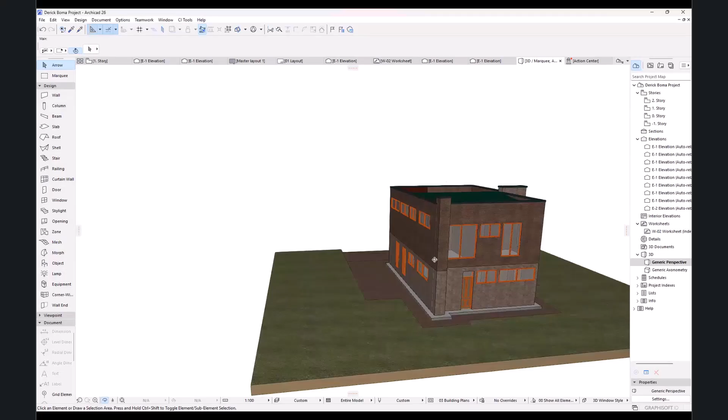Okay, share the screen of the last assignment and see where you are. Okay, wait, share. This one, sir.

So you are left with this, this is the first floor, and this is the ground floor. Your dimensions are not visible. Put in the scale of 100, 1 by 100 for me to see.

Okay, let's try. Okay. Yes, are you using millimeter? Yes, I can see. So...

And the wall of 230 for bearing wall and 150 for partition wall. That is not what is on the drawing, but it's okay, as long as what I need is to see that we are together. Okay, sir.

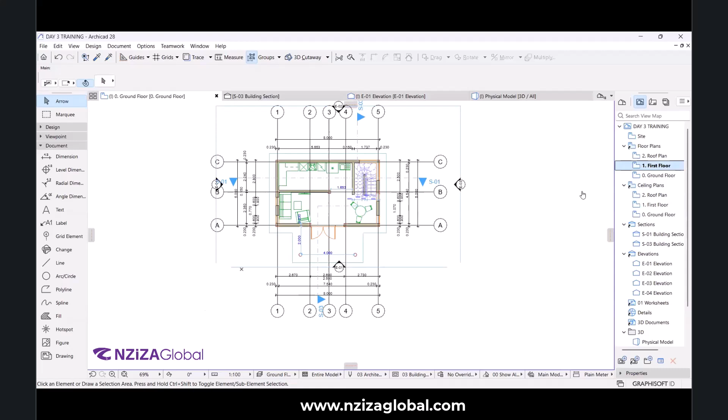Even the first floor is prepared. What is left is making this drawing black and white, and after that, prepare drawings for publication.

And in publication we will learn how to create a customized title block and the master layout. Then we will learn how to put on drawings and automate their publication with all information needed in the project.

According to the curriculum, let me check again. Today on day 4, we must create layout, rendering, schedules. Only that, other things we have covered them.

And renderings, I don't use ArchiCAD for renderings. I know it does it, but I don't use it. So, but one of our instructors in the architectural department has prepared a clean video for rendering using ArchiCAD, where you'll be able to produce top quality renderings. So I will share that, and you can watch it as you watch these recordings.

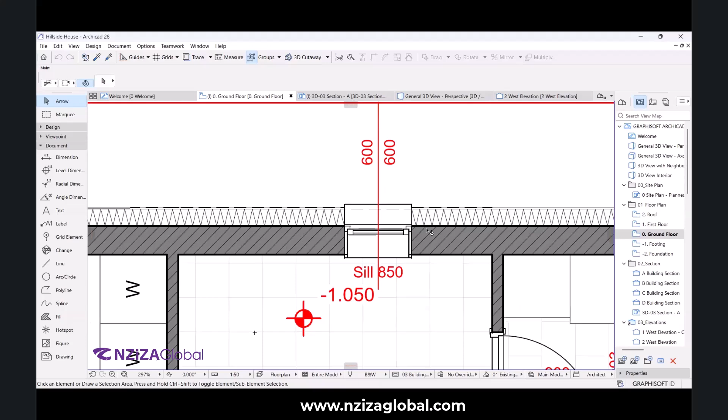I think what we didn't look into is putting this type of dimensions on the door, but we have learned to put them on outer dimensions. Even this one, we can look at it. It's a very simple and quick way.

But what I opened this to do is to show you how a drawing should look. You see, the outer walls are very bold. The furnitures are not that bold. The dimensions are in red, like one color everywhere, which makes it look very professional. Let's go into section.

If we look at section, furnitures look real, doors look real, but walls black, roof black, everything else black. And here underground, you can see they use the fill to make sure everything looks black.

Here is the 3D. You see that, okay? Now, that is what I needed to show you.

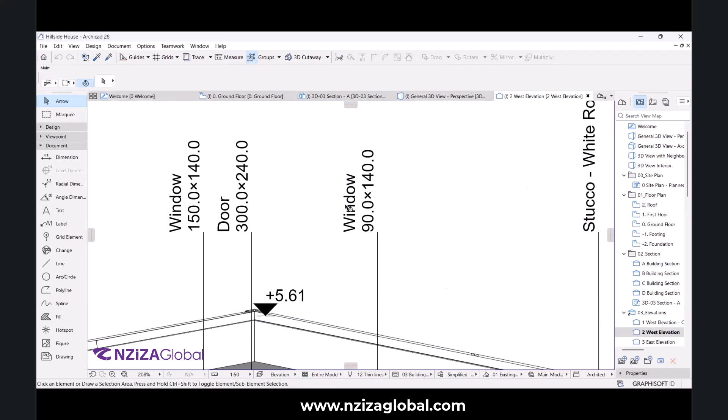Let's see elevations. Yes, you can see elevations. They put elevations, they put what we call label that we're gonna see now. Stucco, white rough, window - they put its size, everything. But this drawing is not detailed enough in talking about labels.

You can see how documents are planned here. There is a folder of site, there is a folder of floor plan that has all plans, the folder of section that has all sections, elevations, everything, schedules, everything. So we need to prepare this thing.

This is in a view map. When you go into layout book, you will see everything we saw there - site plan, its document, floor plan, all documents. You see everything in its folder. This is what I'm talking about.

So I'm going back to my drawing. I don't want to save anything. Now, you see our drawing?

Let's come on ground floor of floor plans. And these things, these are not in a layer combination we created, so I will switch to our layers combination. And let me delete this one. Now,

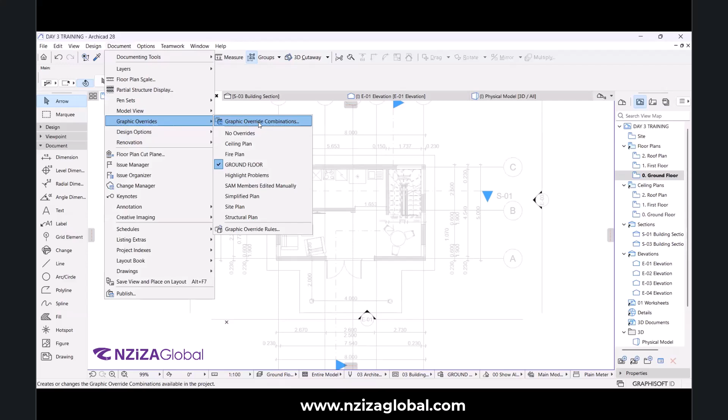How do we do that? Go back in Documents, Overrides, graphics overrides combination. Now, this is everything. We're gonna set a new rule.

This new rule will look for walls, will look for anything we cut vertically. You remember when we were learning about the cut plane and the floor plan cut plane. Now, what does that cut plane cut?

It cuts walls, columns, doors, windows. Is there anything? I think nothing else. But this time we need walls, columns to be black and the doors and the window to be red. Just we are trying to interpret the drawing we saw from ArchiCAD 28.

That's how it is. So I'll create walls and columns and click OK. Now I'll go here and set its rule. Element type here is all types. We will change from all types to wall.

That's number 1. Now we'll add number 2. When we create a number, we click add, and number of things will come here. What we are changing is in main, it's an element type we need to change. I'll click on it, click add, and when I add it, it will come here. Element type is all types, we'll change from all types and go to columns.

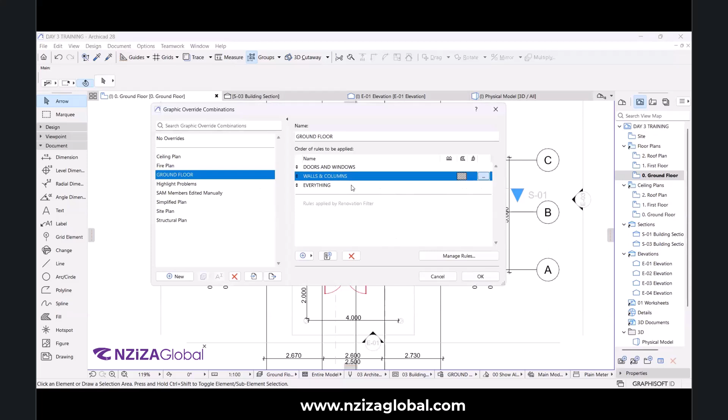For example, I needed to change this grid system to red as well, like doors and windows. I'll go into this document. I will go into walls and columns, and I will delete, I will remove grids, remove, then click OK, and OK. You see, it went back. I'll go back there,

and I will add them into doors and window, that's where we need it to be. And I will add grids, sorry, grids. And I'll click OK, I'll click OK. You see, they also come in red.

This way you see our drawing looks more professional. So if it was a big drawing, of huge size, I can see this section line and everything also are not included. So furniture must stay this way. It's the perfect way to make them look, because we don't need to confuse our architectural plan. So this is because this is architectural plan, like construction plan.

If I was doing a furniture layout, I would go these walls, make them in a smaller resolution, and make this furniture appear in bold, because that is what I will need to present. But now we are presenting a construction drawing. We don't need the furniture to be big. So how do we go about it?

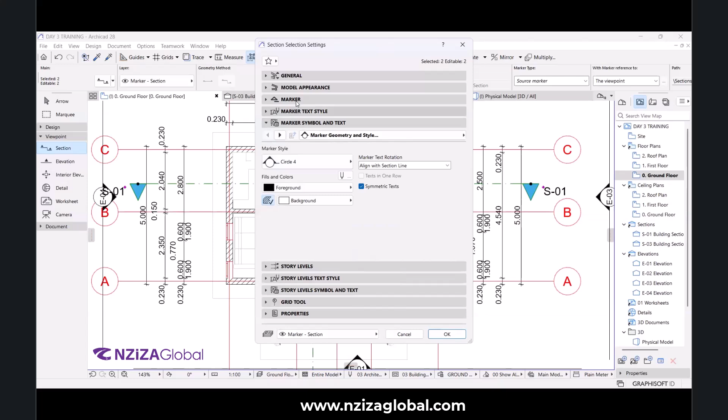I'll change this to black, and go to marker symbol. I'll move down to circle 4. I'll go back into marker and see how it looks here. I'll move it to 10 millimeter, see how it changes. I'll go into text and change it to 2. Here, the text size, I'll change to black and click OK.

You see, our section looks more beautiful. You see, we have section 1. We also have section 3. There is no section 2. We will change this to section 2.

I'll come here in the section setting. I'll go into, is it general? Yes, general. Section, this is hyphen, yes, 03, I'll change to 02. And I'll click OK. You see, the name has changed.

It works the same on elevation. This is elevation 1, elevation 2, elevation 3, elevation 4. Perfect.

Now, that is a good way of preparing the drawing for publication. I will remember to save. Now, that is ground floor. You can do the same to ground floor. You can do the same to first floor. Please try it and see if it works before you go to the next step.

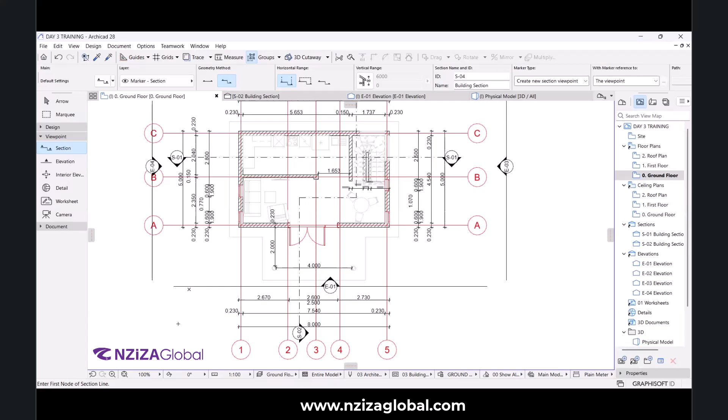So to solve that, you come into option, element attributes, pen and pen colors. And here, you come down here and you increase. No, you select which one have you been using. You have been using this one. And maybe it is because we turned it into centimeter. But to fix that, you can select wall, go into wall setting. If you come here, cut surface, cut line pen, you will see it's a 0.35 millimeter, which means this needs to be increased so that our line can be more bold.

We'll go into option, element attributes, pen and pen colors, and here it is 0. When we click on the color we choose, it is 0. It is 0 because by default it is 0.35. When it is lower than 0.5, the software goes down to 0, but the number you put there remains there and real. And when it is above 0.5, the software will put it to 1. Let's do 0.6. You see, the software turned it to 1, and I'll click OK.

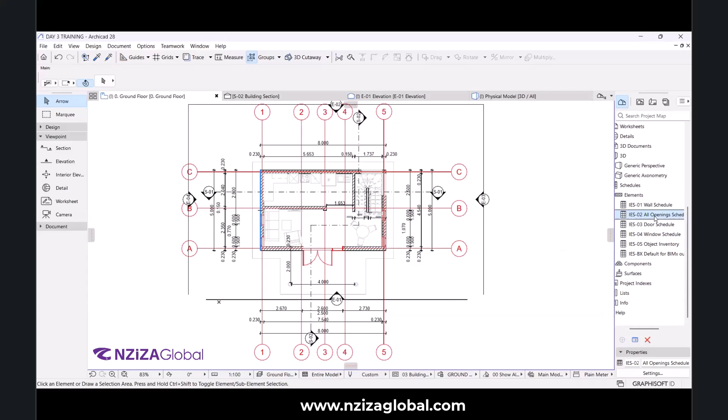We can do one by one, but this time, like wall schedule, we don't need it because we only have 2 types of walls. Let's check opening schedules. How do I do that? I'll open it, double click. You need it to follow. I will double click it.

Now, by default, it is very chaotic. It has a lot of chaos. We need to prepare it in a way it will be published on the paper and look excellent.

How do we do that? Firstly, there are details here that you must understand. We have title, which is all opening schedules. There is element ID. You remember when we were pressing every opening, it used to come with its ID, and this ID is editable through the floor plan. Now, when you see here, there is element ID, corner window 001. Here is the door 002, door 002.

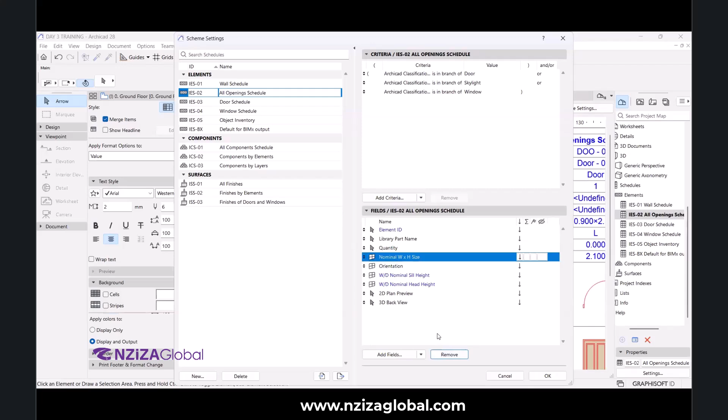Now it is requiring me to slide like this so I can see other sides. To fix that, I will come down here and click to fit. Now everything I have in my schedule is visible, so I can judge my drawing now. What else do I need to remove?

There is an opening name, this is very important. There is, I can click here to move down. There is a quantity, very important. There is a width and height size. Like orientation, we don't need orientation. Let's go on scheme, I will find orientation and remove it, and click OK.

Once I click OK, you will see the number of doors that were duplicated. Do you remember we had this type of door in two amounts, two categories? Now it is combined and quantity is saying two. We have this type of doors into two. Why? Because one was in orientation of left, and that was in orientation of right. That was making them two separate categories.

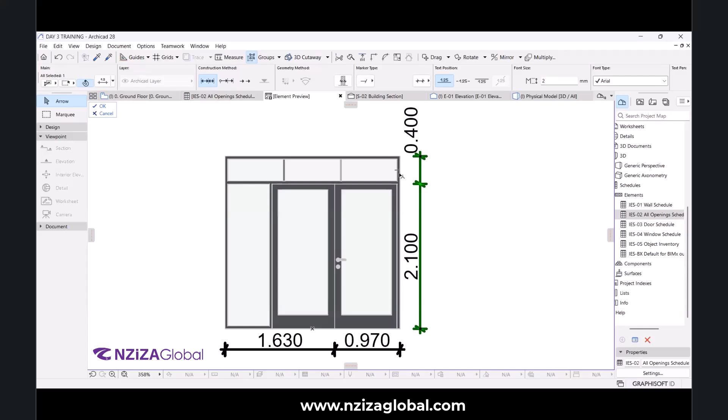This is dimensioning like normally we do. You select this dimension line, just normally we do in the dimensioning. And you will select control, and you will select where you need the drawing to look. If you remember, this is exactly what we set on this door. We said that the shutter should be 2.1 and transom should be 0.4, totaling to 2.5. And here I'll select the line, I'll click control, and I'll click here.

Which means this is bigger than this? No, it might depend on where you click here. You just have to make it equal, because this is what I'm showing. Once that is done, and that's what you exactly needed to look, you come at the top here, you will click OK. Once you click OK, you will see that here, those dimensions displayed as visible.

Now, we still have this door and this door. They look exactly the same, but they are differently categorized. How do we fix that? We will fix that on element ID. This is called 003, while this is 004. And as long as both doors are the same, they should have one ID. How do we fix that?

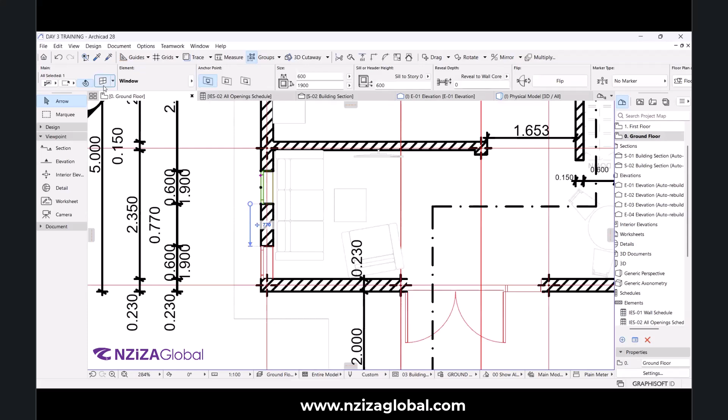I will select it, select on floor plan. Where was this one? I'll go into setting, classification and properties, and I'll change it to 1. And I'll click OK.

Go back here. You see, it has become now 8. Why? Because on the ground floor we have 4. On the first floor we have another 4.

But I think there is again another mistake here because one door is the louvres, another door is the glass, right? It's good to make this mistake so you can see how to fix it. I will come here and I will select the one of glass. And I will go into setting. I will make them 2, window 2, and click OK.

If I come back here, you see there are 4 with louvres, 4 with glass. There we go. This is all opening schedules.

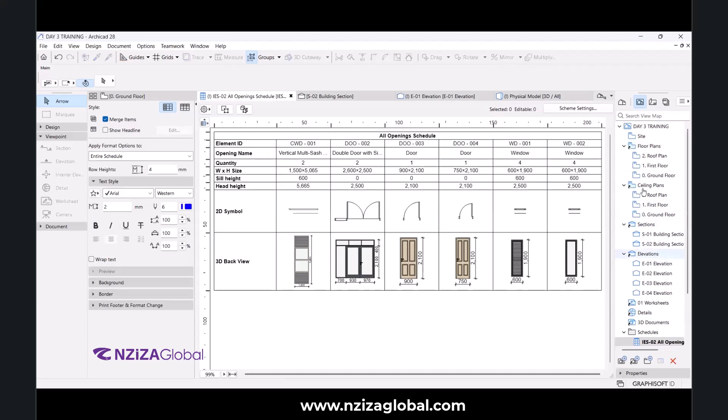Now let's click on ground floor. If we click on ground floor, you will see the software will bring its settings the way it needs it, which is not what we need. Okay, I will click how to turn it into what we need.

I will right click on this view. I will go into view settings. Now, everything here, I don't have any problem with it. Now there are things to change here.

Layer combination - this ground floor, we have made it ground floor arc in our layers combination. Now, pen set, architectural 100, it's okay. Another important thing to change is graphics override, because we changed it in the graphics override combination.

We turned it into ground floor. Okay, you remember that, doing that? This is how we named it.

Now we will come into 2D and 3D. You will see it is dimensioning into plain meter. I will change to these dimensions - just dimension we created on our own to make sure everything is in millimeter, areas are in meter square and everything. Once that is okay, I will click OK.

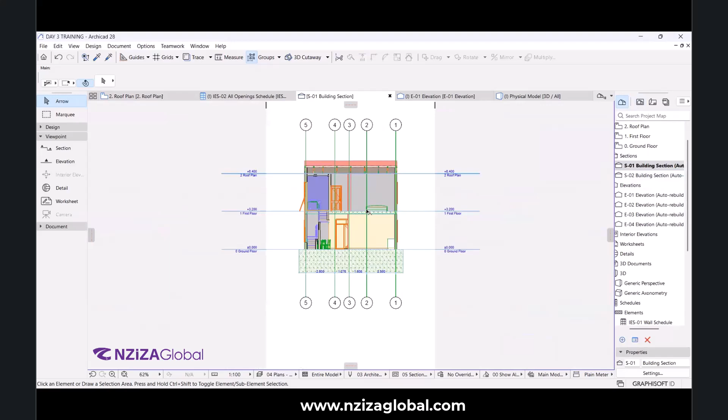But the way it looks, it doesn't look professional, as you can see. Even this one is automatically generated, but it doesn't look professional, as you can see. So now, how do we prepare it professionally?

Firstly, we already know it must look black and white. That's the first one. That's simple - I'll go in the override combination and change it to ground floor. Just a quick way, but you should go and customize it in a way you run it, like making everything here black and white.

You see, because it's in a section, a number of things don't look clear. I'll go back to no overrides. And I will go to customize to make it professional in a way we did it on ground floor.

How do we do that? You remember all the processes, but let me repeat them. On section, it is applicable. On elevation, it is applicable on.

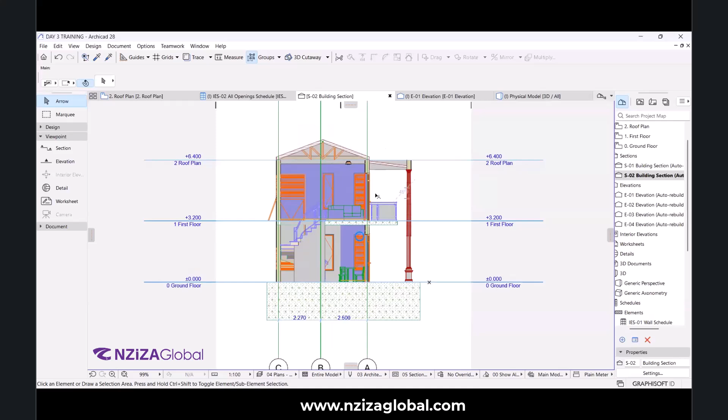How do we go about this? We will go into documents, graphics overrides, graphics override combinations. And now the combination we are going to create is called section.

Once that is created, Gaspar, are we going together or are you also watching? Because I need to know the speed I will use. Are you also practicing or you are watching? Yes, we are going together, I'm practicing. Okay, if we are going together, let's go slowly, because Victor was watching, so I was not going quick, because we need to revise later.

Now, did you open your graphics override? Yes. Okay, now once you are done creating graphics override, you come here and set rules.

Rule number 1 will be - no, will be everything. Here we'll set everything. And I will create - this name already exists, yes, I can do everything slash 1. It already exists because we used the same on ground floor. Then I'll click OK.

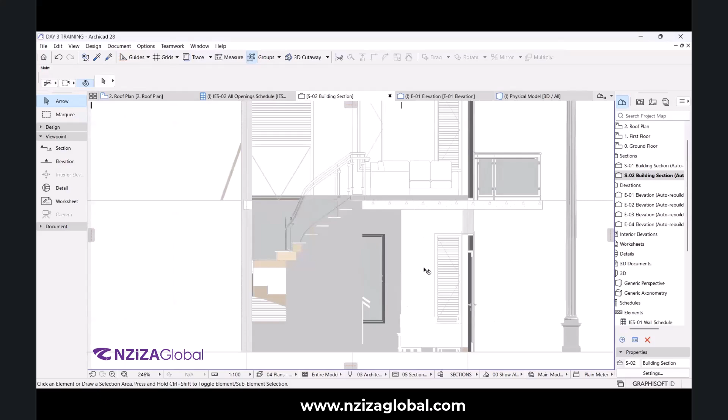I believe everyone is here. Now the second step is to make this wall, these beams, this what visible. How to do that?

We will go back there, documents, graphics override, graphics overrides combinations. We are in a section, everything is set. Now we're gonna set walls, beams, like something we need to appear in black. What is that? There is walls, columns, roof, etc.

So we'll set rules and we'll make it walls, beams - do we have beams there? I don't think so, but whatever, etc. Okay, you name it the way you need. Then I'll click OK. Now that's the rule we have created.

We're gonna set terms, click here. Now element type is everything. Now we'll change it, it has to be wall only. That is wall only, but again we don't need wall only, we need also columns, and even roof. Let's start from roof, let's go to add.

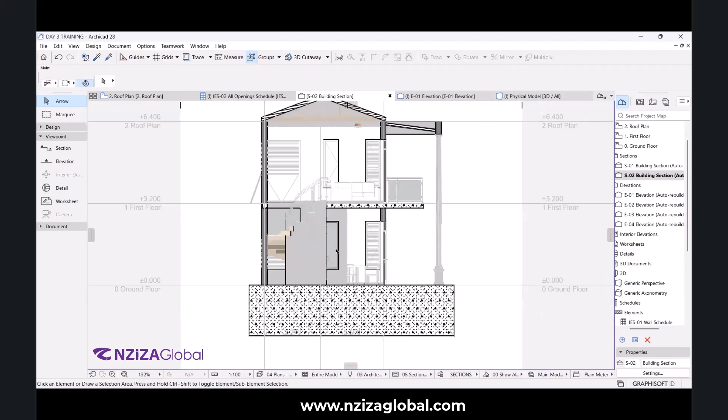What else? The else is doors and windows that I'm seeing there. How do I do that? And even this elevation and the grid line. I'll go back, but I don't need to create new.

Yeah, I think I need to create new, so I can make them look red. I'll go here, I'll create a new rule. This new rule will be dimensions and the grids. Click OK.

I'll go into setting my rules, element type, not everything. I'll make section, add another one, main element, add, all types changed to elevation. Do we have elevations there?

Yeah, we do. Okay, add. Is it elevation or it's levels? Let's go to elements type, add. Then I'll come here and it will be, is it dimension? Should we make dimension included? I don't think so. What else should we include?

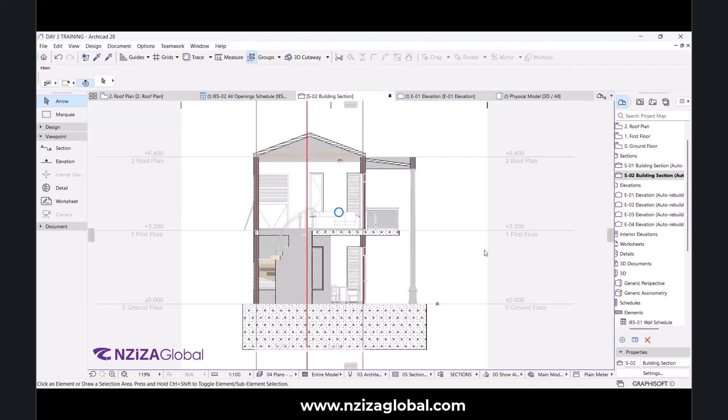Now, we are going to prepare our drawing in a serious way. This is, do we need this? Okay, let's suppose we need it.

Dimensions. Let's go add the dimensions to these walls. Graphics override, that is wall and beam. I'll come here, I'll add element type, add.

Select more dimensions. Click OK, click OK. Now we can see...

Do we have, I think, roof trusses? Roof trusses come as a part of object. If I go and add them, let me show you. We need it black, so we'll add it in the walls and the beams.

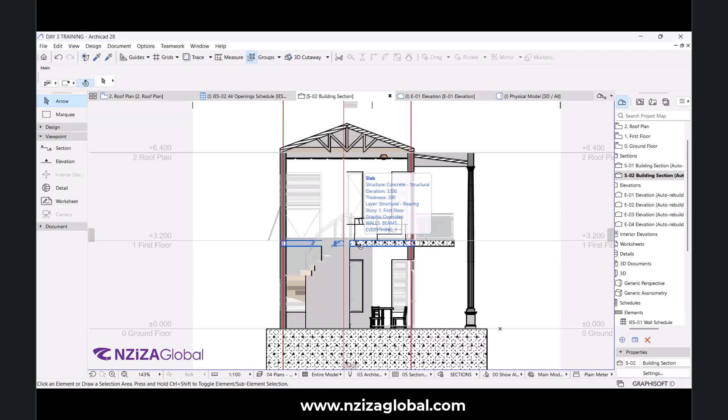Now, that is about coloring, but our section is not yet looking professional. If you remember, section cut from roof to underground. What are we going to do about this?

We will draw other things here. What are those other things? Subcolumn. And here we'll make this a soil, not concrete as they look.

Okay? I can right click, hide layer. No, that layer, sorry. What was that layer?

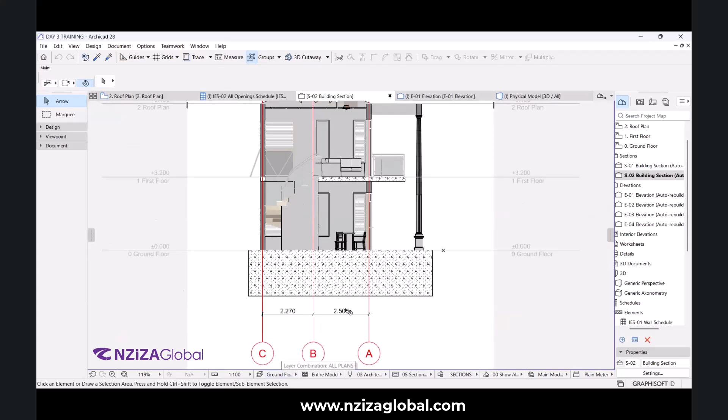Let's continue with what we were trying to do. Okay.

What is the next one? The next is section. Section, what first thing section must show? Section must show levels. To do that, I will go into dimension.

There is a level dimension, which I don't know why it's not displayed. But I can click just, no. This level dimension is level for floors in 2D. That's why it is not displayed. To put level dimension in section or elevation, you come into dimension and you come into dimension setting.

If you put anything there, trying to dimension from here, it will dimension like it's a floor plan. That's why it is important to come here into setting and tell the software that you are going to be dimensioning vertically.

You see? And now here, it is how this icon will look. I can choose the first one. And here on the second is, do you need to pick the top of the material you need to show dimension, or bottom, which is the same?

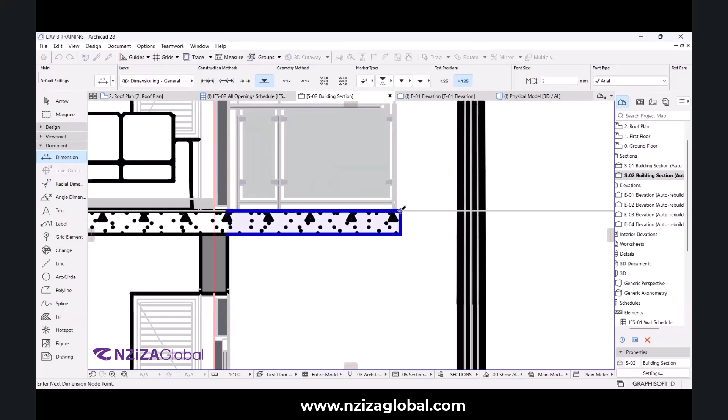Here it's automatically dimension walls and slabs. I'll click OK, and I'll start at the top here. I'll click, and once I click, I will need here as well. And I will need here as well. And I will need this slab as well. And I will need this level as well. Once I'm done, I'll right click OK, and I'll bring it on the side.

You see that it will come and take the levels. Okay, it means that here it is on 0. Here it is on 3. I can drag this aside here. Here it is on 3.5. This one, I can drag it on the other side.

This way, so it means from here up to here, there is 1 point something. Now here at the rooftop, it is that way. That is the dimension. I can come and continue even on this side.

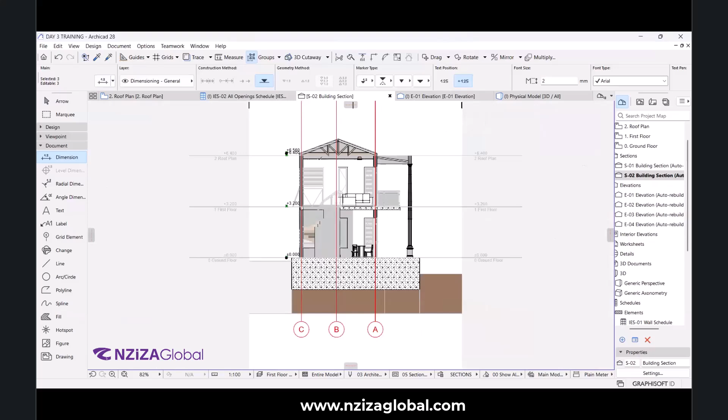You see, very small. That is number one thing you must do on your elevation, on your section.

Action number 2 is to annotate your drawing. Because if I look at this section, how will I know this is a gypsum ceiling? You remember this is Armstrong ceiling. But how will I know if I am looking this way? These terraces, is it made of wood? Is it timber? Is it steel? You must leave no confusion behind. Everything must be clearly, what? Clearly annotated here. How do you do that?

Gaspar, are we together? Are you on the same stage? Yes.

Okay, now we need to annotate, there is auto annotation here. You come here on label. Now this label, you click here, you come into setting. How do you need it? Is it auto text? Is it classification and properties? Is it ceiling, slab levels, things like that? There are a number of things. Let's use this auto text.

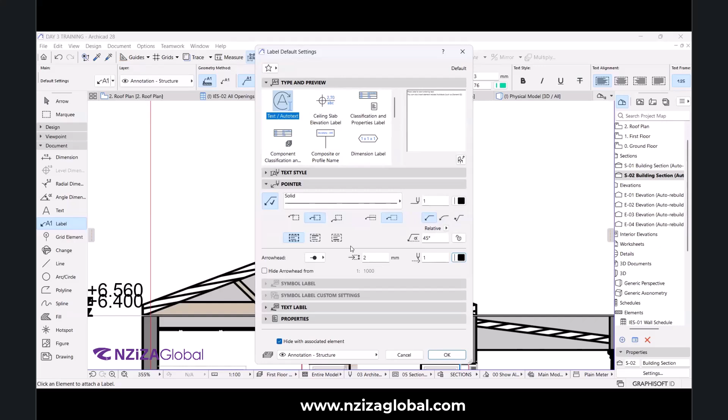Make sure it's black. Text 2 is enough. Pointer, how do you need it to look? I need a dot, and I don't need it curved. I need it with angle. And I need it black and black. Text label, you need it this way or this way. It's just, this doesn't matter. And you come and click.

Once you click, now there is, sorry, now a label. Where is it, label? Then click. You need to type. What is this? This roof, what did we put on? When you see roof, what information must you know about the roof for you to be able to construct it without troubles?

You must know roof covering. You must know roof structure. You must know the pitch. You must know, I think that's all. So let's say timber roof structure, pitched on 25 degrees.

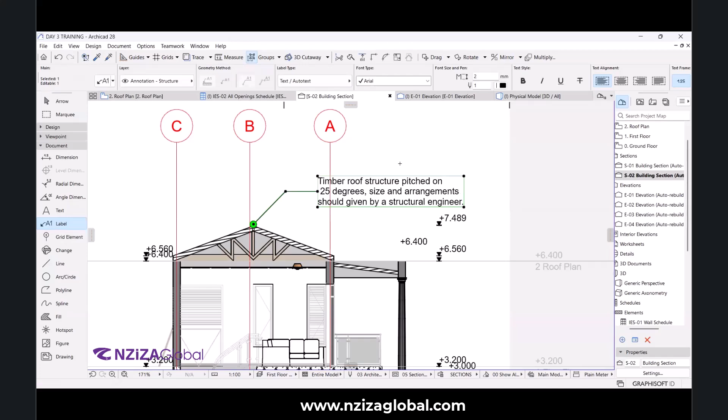number 1. Ceiling, let's press another label on ceiling. This is Armstrong. No, we don't need to do these protocols. We can do. This is gypsum ceiling, gypsum ceiling.

What other details do we need on ceiling? I think it should be level, and we'll give it in a dimensions. Does it have light and AC? Those a number of things. Yesterday we put AC and everything. So if it has, we will write it here. That's all.

Now this gypsum ceiling is conflicting with my dimension, and this font is too big. Let me put into 100 to see how it will look. There are too big, so I will select them. I'll go into setting. I'll go into pointer, here is 2, I'll put 1. And I'll click OK.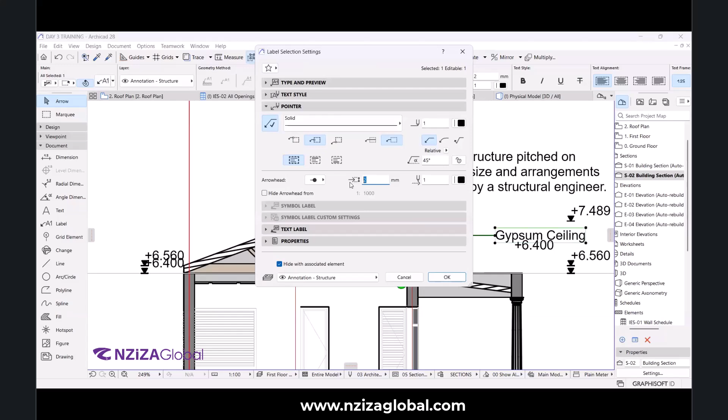Now it's conflicting, so I will select, click here and go to move, and I'll move it this way. That's all. That's all.

Very tired. Teaching is not an easy job, I can say. Now, let's go on.

Sorry, there's a disturbing guy here. Now, let's continue.

That's the second thing. Now, please understand that anything visible here which is not clear, you must put its label and explain it.

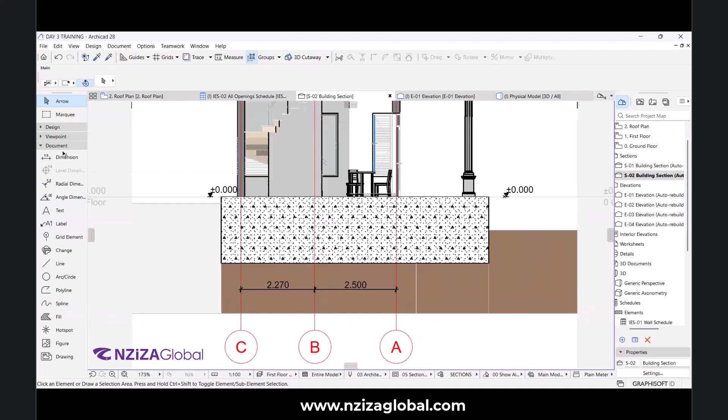How do I fix that? Firstly, there is part of floor. Please follow. I will go into documents, fill. It looks like drafting general is not visible. I'll make it visible. Come here, drafting, visible, set.

Okay. Now I'll go to fill here. What you must understand first, its depth. Depth will be 20. That is number 1. Number 2, this structure will be made of concrete because it's flooring.

I'll come here. I'll go to dash here. I will find the section that looks exactly like concrete, reinforced concrete - structural concrete. I'll click OK, and I'll make sure it's black, and I'll click OK.

Then I'll come to place it. Now, placement is, there is a polygonal or rectangle. I'll select rectangular, and I'll come here, and I'll switch up to here, and I'll make sure I move down 200. Now you see my dimension lines - there is dimension 1, there is dimension 2. Dimension 1 is horizontal, which is okay. Now the issue is moving down.

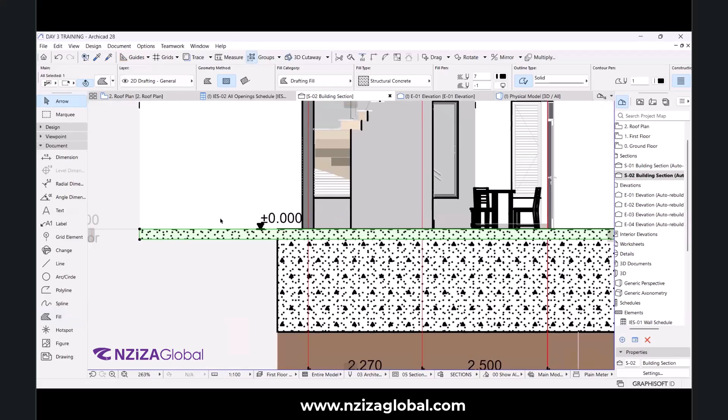You see my concrete now. It doesn't reach there. I will select it and expand it the way I expand other things.

That is concrete. Now there is another short pair of floor finish. I will do what? I will click. Remember, we are doing a section of this, but sometimes you might find yourself needing to do section of even site, etc. But I don't understand where I will need that one.

So let's go to fill again. Fill setting. Now we will not select concrete, structural concrete. We're gonna select - do we have cement? No cement. Finish? No finishing. When you miss it, I saw something like carpet. Let's see tiles. Facing tile.

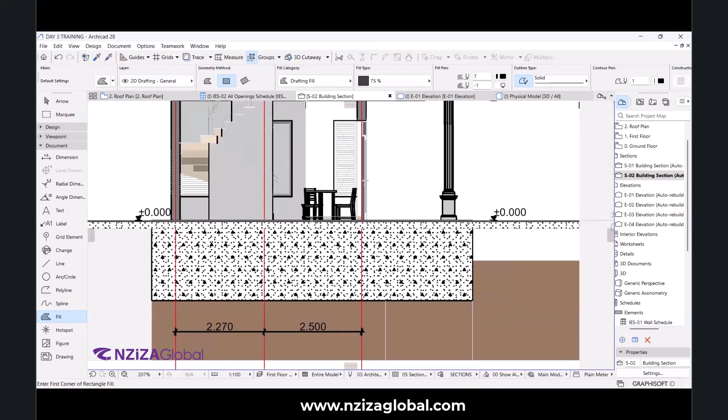Now, if we put on 100, you will see there is something there. Aha, now below this concrete, what is there? You might put whatever you need there, but you must follow construction standards. Let's suppose there are stones.

Hardcore. I'll come in again, I'll click here. I'll go there. What is the size of stone? I'll click tab again, and I'll put 300. So this fill, I'll go into editing. I will choose stonework - fill stone. I'll choose fill stone, and I'll click OK.

But this stone, I don't think this stone is a finishing stone. No, I think it will look like this. Then I'll continue. So below stone, what is there? Below stone, there is a soil. Or I don't need this, I can cut from here. How will I do that? I'll go to fill to remove these things below.

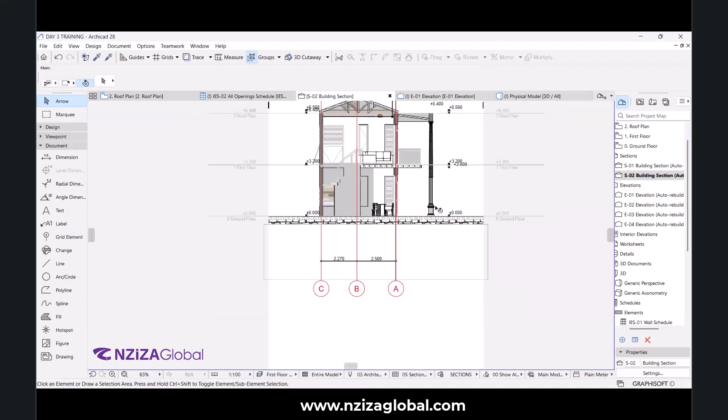Okay, that was the last - did I say last? Now let's go to the last thing you must do. Is it the last thing?

Let's go to underground. Underground, there are other things that must be shown: subcolumns and section, and the footing.

How to do that? I will go into line. I will start the wall, move down to wherever I need. Let's move down 500 - sorry, it has not to be right, it has to come here. I'll come here and do here.

500, move down. How big will the footing be? Let's do 1 meter, because this is not the job of the architect. 20, no, let me do 40 of thickness. Now I will reach here and click OK.

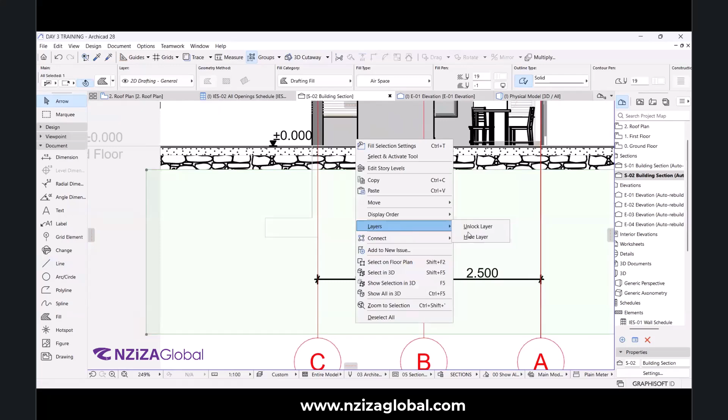Sorry, I will select this one, this one, this one, this one, and I'll click Ctrl-Shift-M to mirror.

These lines do not look like this at the top. Why? Because in my graphics overrides, I didn't add drafting. Command add.

Okay, now this line - because they are underground and we don't know them - should not be a continuous line. You will come into solid line, you will select dash dash line.

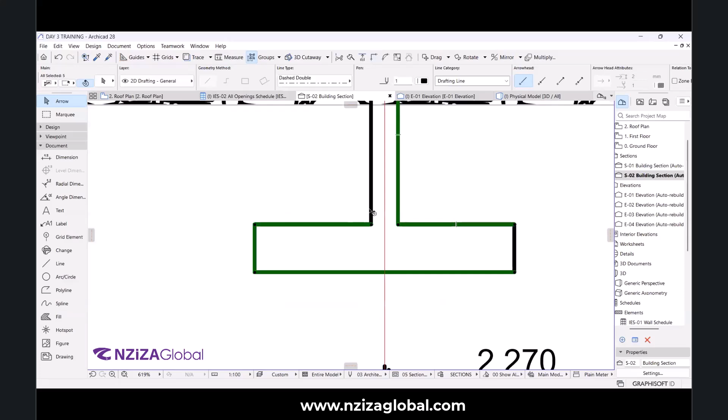Setting, double dash, click OK. Did it work?

I don't really know this kind of stress. I'll come here, select this solid line, double dash. Now let's click dashed, make it black, click OK. Move here, move here, move here, move here, move here.

I don't know why it's not being dashed. Now I will check why it's not being dashed. The first thing is you must move this.

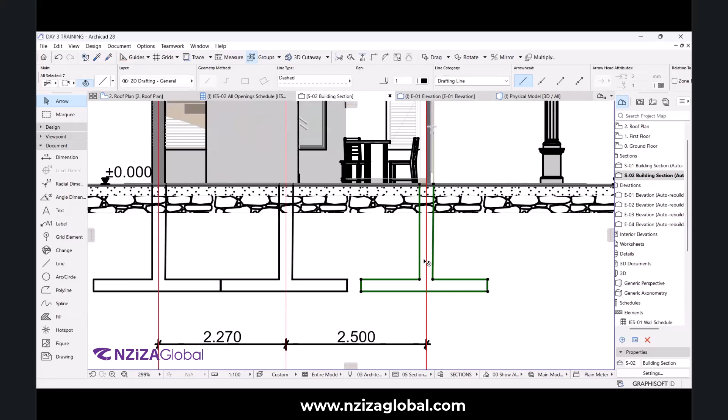Ctrl-Shift-D. And make sure they are in the center, and make sure they are on everything that has a grid, because this grid represents the columns. And also Ctrl-Shift-D, and this one as well.

And because this is for balcony, its footing can be shorter, no problem. Okay. As this one is in the middle.

Now, once that is done, you must fill. Click fill, because this is a concrete - this is a concrete thing. Concrete, structural concrete. Click OK.

To fill automatically, you select everything is set, you click this space bar on your keyboard, and you click in the middle of where you need to fill. Middle. And it will be filling automatically.

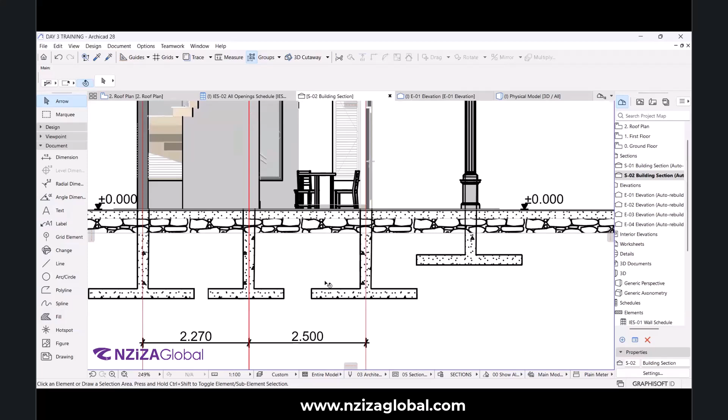Okay, now this is not our job, this is a structural job. That's why you can leave it like this, or you can write 'subcolumn' or what, and put that the details will be determined by a structural engineer. That's very important to highlight.

What you must do as an architect is to put labels on this type of footing. Now, these footings are here, but they are not in the air, they are in the soil.

That's why you need to change this fill to soil, earth. Click OK. Click OK. This is earth.

Now we have got a section, a very serious section, but there are things that are missing. I hope we are going together. What is left is to make our section more beautiful and sexy. How do we do that?

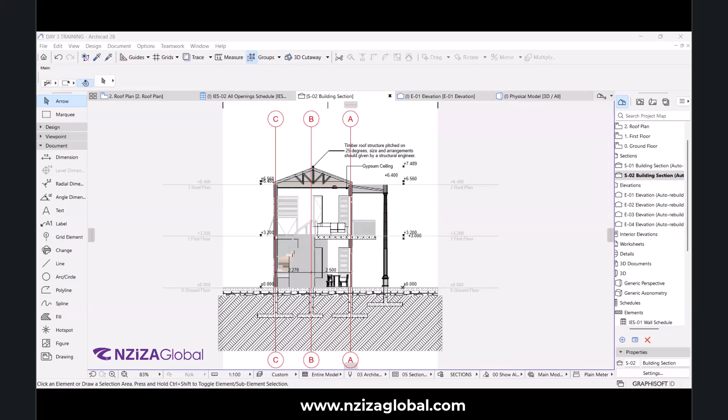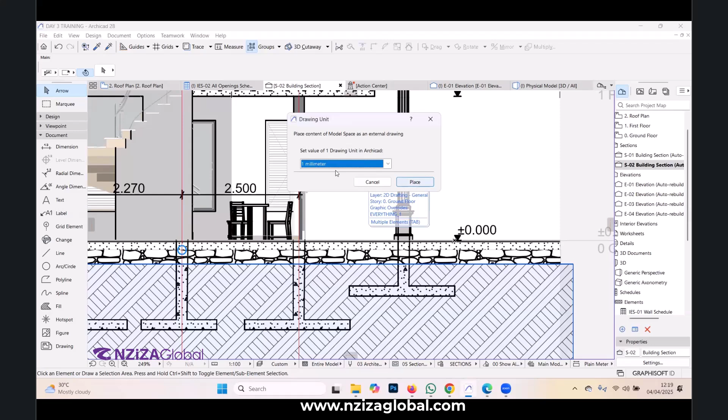The software will tell me the set value of one drawing unit in ArchiCAD is 1 millimeter. You can change to other units depending on the dimensions you draw and used in your project settings. As I'm in millimeter, I'll click yes and press.

The woman has gone into soil, so I will select the image. I will bring Ctrl-Shift-D and I'll bring her up.

Bringing her up, even if deselected, she remains looking blue and with a frame. To fix this, I will select it, do right click, and come to explode into current view. The software will ask me this, I'll say okay. Then I will select this frame and click delete on my keyboard. This woman remains 2D there.

I will go back and download someone else. I will download this Donald Trump image. I'll open this folder, come here and drag it into ArchiCAD. Let me put him here.

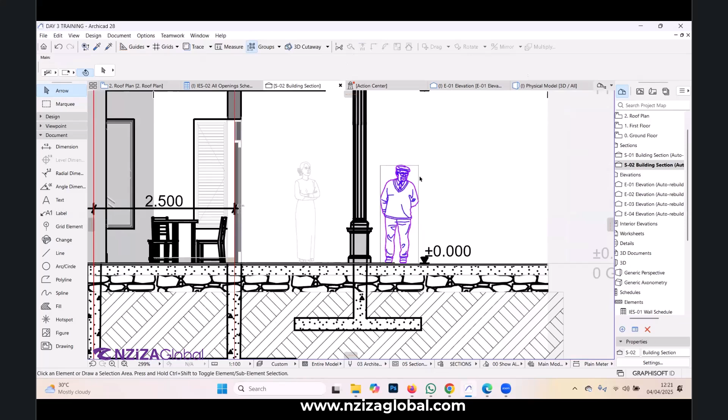Ctrl-Shift-D, click this dot, move her up. I will select, right-click, explode into current view, OK. Deselect, select it, send delete. Now, I'll do 100.

You see how my section will be looking. This is about the people. You can go back there and download the trees and furniture, etc.

Let's download this tree. But downloading a tree is a waste of time. Please do that, and once it works, I will show you how to bring trees and sky and everything automatically.

Let's continue. The next will be to put trees and cars and other things automatically. You will come to Google, you will write architectural section background.

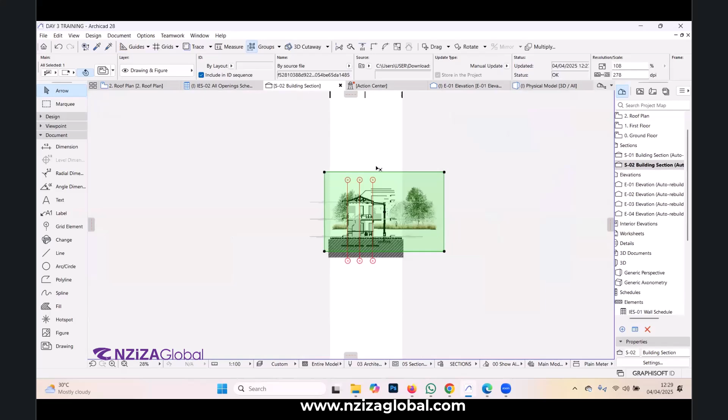Control D, move it down this way. But this image is too short, and if we go to expand it, I think it's possible we can expand it this way, but I don't think it will look beautiful. It will become a mess immediately. So I'll leave it, I'll go back and download the other one.

File, external content, Place External Drawing. Import. Click.

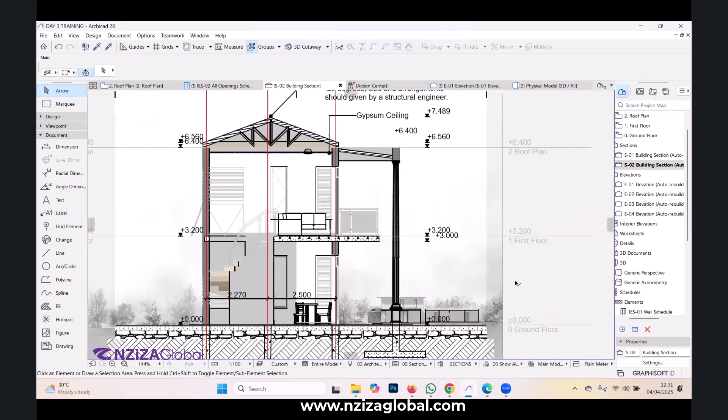You see, it has gone back and it's looking small. So I think this is suitable for elevations because elevations don't need this type of detailing, dimensions of what and what. You see, we even have a house there.

Or I can do this way, and I'll move down, Control D. This one. This is the way, but my people disappeared. Did I delete them? I will select this one to make my people visible.

Right click, display order, send back. Once sent back, you see my people now are visible.

That is all. I think we have run everything we need for section. It's you who's left to go there and make the section more detailed in the way it will be used in a construction project.

Now, what is left? It is to put on... What is left? It is to come here. Oh no, let me wait for you. First finish, reach here and say everything is on the same before I continue. It worked, so we can continue. It worked? Yes, okay, let's continue then.

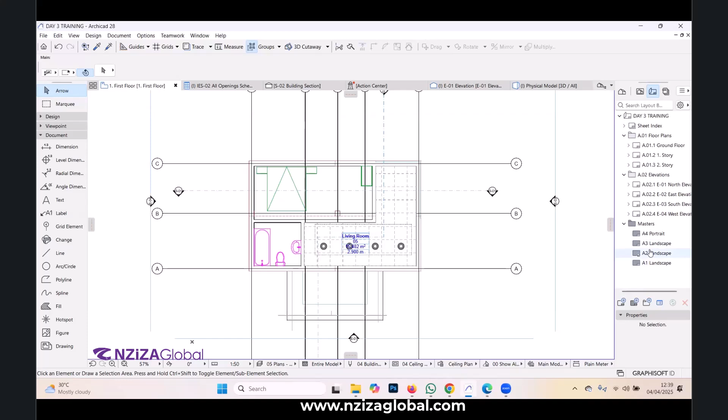So now when it's there, we know everything regarding the project. So now I believe all of you know what a title block is and what should be incorporated there. Now we are going to prepare our master layouts. In my company, we use A2, so I'll come here in the layout book, I'll select A2.

But depending on the project specification, your client or project requirements might oblige you which paper size to print your drawing on. Some projects oblige that. But if they oblige A3, you will come and set A3, it's here. If A4, you will set A4. If it is A1, you will set A1. But now we will set A2 just as an example.

Now, setting A2, there is a title block which is by default. But the title block has the revision history, which is okay, company title, which is okay, but it has a number of other things we don't need. Okay? So there are even other things that are missing. How do you add them?

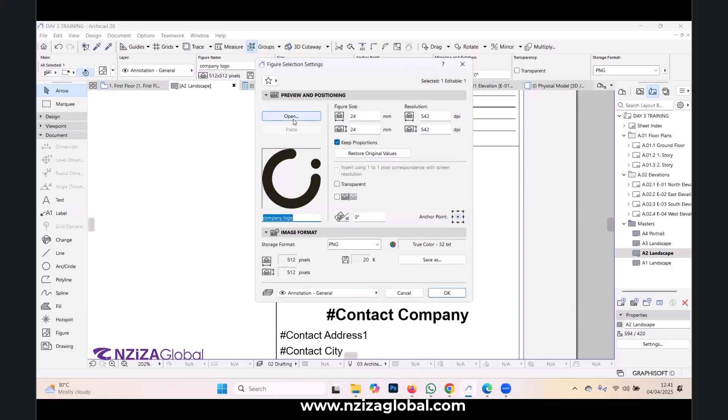Firstly, let's add what is possible. There is this logo which is by default of ArchiCAD. We'll change it with our company logo. We will select it, go here to change image. There is this company logo. I will click open to go into my file to select my logo. I will find our company logo here. I will click open, I will click OK.

It comes big by default, I will have to resize it. I'll click here and I'll click here. The company logo is already there.

Now, contact address, everything is here. Okay, but please follow these things. These are normally the same on all projects. For example, if we are talking about company address, postal code, the country, everything, it is the same. Project name, it is the same, even its address, it is the same. What is different is the drawing name, and this master will detect it when we place our drawing. Modified by, date, everything, all these things are the same.

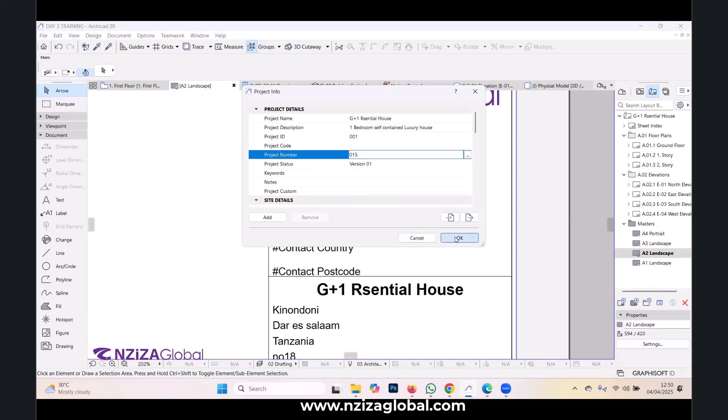Number, contact address - what is this? So, do that and see if it works.

Now that is easy. I think you have finished it, or you even normally know. Let's say we need to change this manually.

I will select, come on text here, and come and enable here. This is Nziza Global contact address: Kijitonyama, contact city Dar es Salaam, contact country Tanzania, postal code I don't remember, PO box 3655.

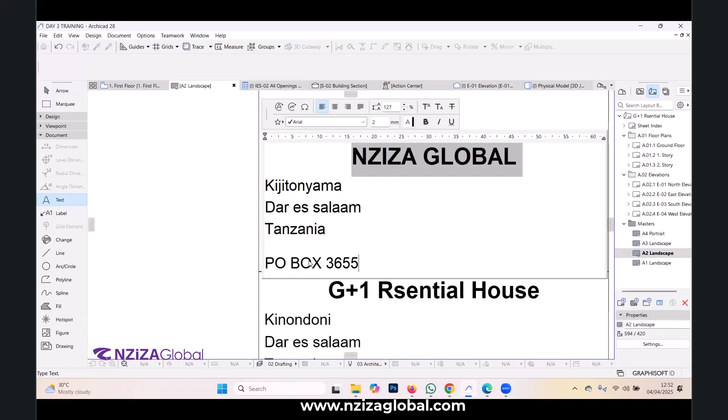Okay, click somewhere empty. This is the way to go to write it manually.

Maybe I need to put our phone and email, even though I saw it. I can click here. I will do insert auto text. One auto text is inserted, I will find what I need to put.

It is a client details, right? And I will put client - is it a client detail? No, it's the contact details of me. Let me put...

Contact email. Click add. You see the contact email I filled in the project info - it is the one that will come here automatically.

Then I'll click somewhere in blank. But it has come in a not good way. I will select it and press it this way - can even select. Okay, that is a good way.

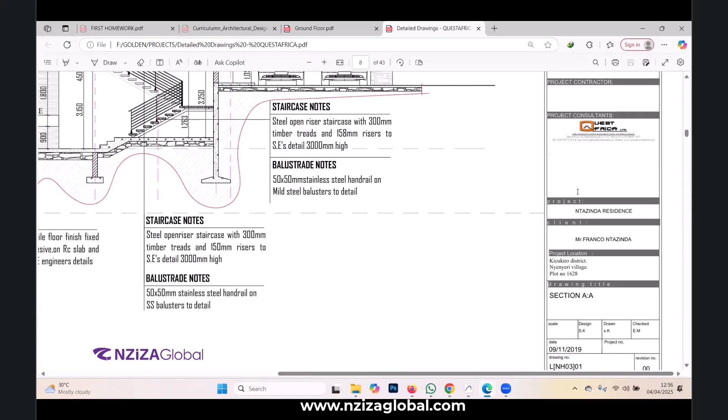You see how it is planned - it is not like that drawing. So by default it is not like this. So we're gonna do something like this.

To do that, I will come and delete - please follow, I will come and delete everything here. But there's no need of deleting them, it will give me a headache of writing them again.

I will come and select, Control D, I move them to this direction. I hope you all know that the title block must be in the bottom right corner. So you can't come and put the title block here or here - it must be touching here.

Whether start from here and go this way or start from here and go this way. Now I will prefer to put it downward here. Would that be okay? I think so, yeah.

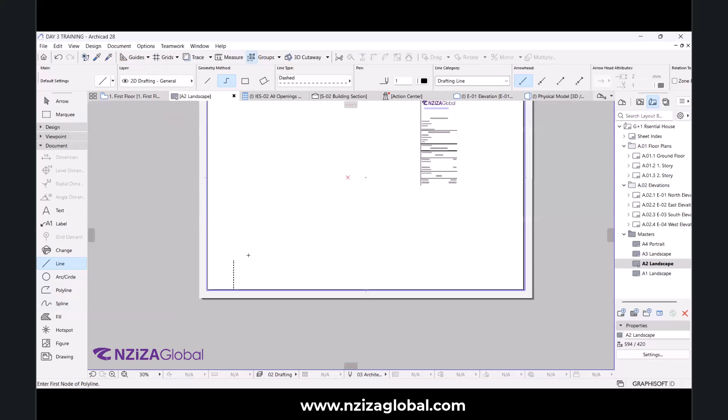Now it is dash dash, I'll turn it into solid.

There are values that I should check, I should set - those values are guides. Set snap point value, and you can see my four parts that I created here are well distributed. I'll come on line here.

Oh, they will be guiding me.

Pascal, did you see that? Huh?

Share screen and do the same.

Give it 60, make it solid. Then you come to this division. You selected the 3 and we need the 4. They are by default 3. So once you need the 4, you go down into set snap points there, put 4. Click OK.

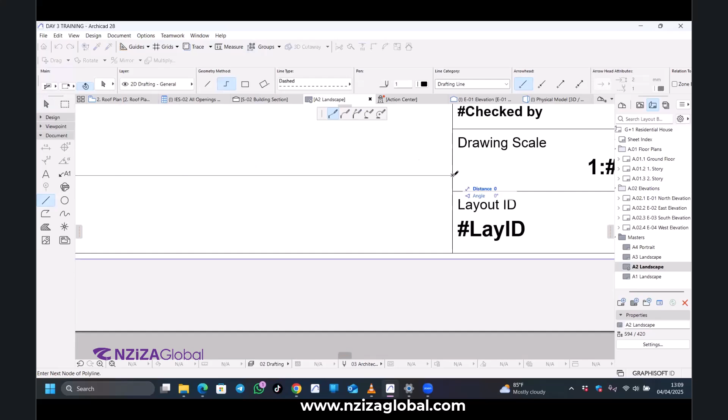Continue drawing, you make them into solid later. Okay, that is a quick way of making equal parts into your title block, but it can work even in other categories.

I can click this, select Ctrl-Shift-D, and move it to 150. And I'll select these 3 lines. I'll come on this adjust and click on this vertical line. They will all automatically move to this line. Now select this one, move it to 250.

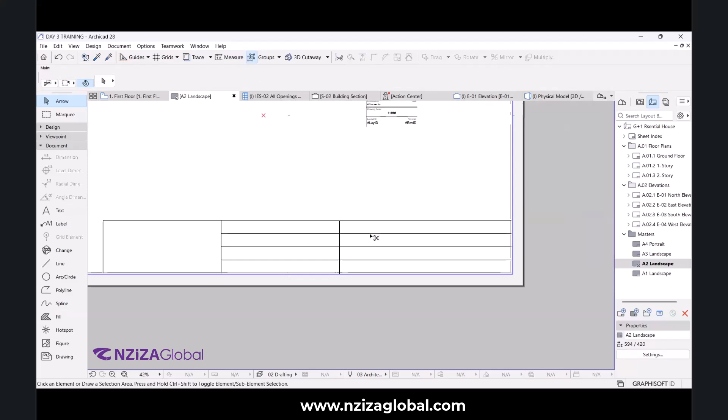You click Control and click on the line you don't need. You can click this line. Ctrl-Shift-D, bring it to one element, click Ctrl-Shift-D, bring in one element, click this one, Ctrl-Shift-D, one, Ctrl-Shift-D, 1.

And you can select these 4 lines internal and click intersect. Once intersect is clicked, you can see kind of a design.

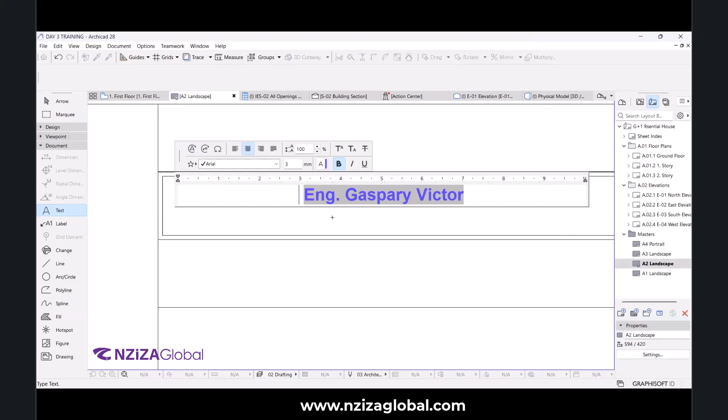That is one way. Or I can copy this, move, sorry. Ctrl-Shift-D, Ctrl-T, bring them somewhere here. And now need this line, Ctrl-Shift-D, move it here. Okay.

Let me bring checked or modified by. This is also automatic, it cannot be typed. Control Shift, Control D. Okay. And I'll Control Shift D, move this one to here.

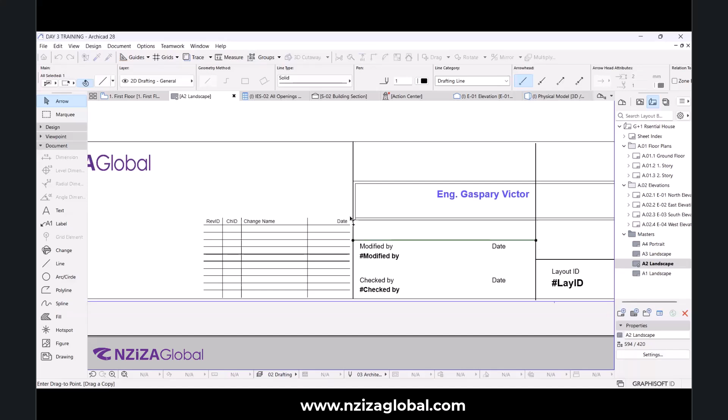Now I'll bring the logo, and I'll bring this table, put it here. Now bring this here. Now bring this here.

Okay, here you can put company address. And you fill everywhere here, you fill everything. I will not. Now let me delete this one. Now here you put general notes. Let's put text, put here, general notes. Like, do not scale this drawing, everything.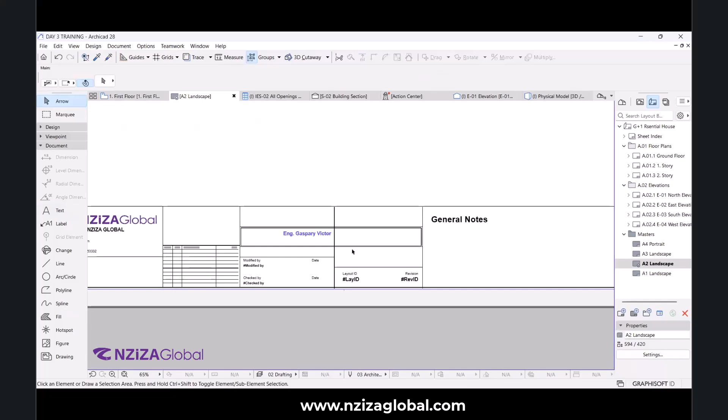And put 5 and arrange them. And then can select here, go here, align from left. And I will write here like general notes, I think you all know general notes. Now this is our master layout. It means that we're gonna be putting all drawings on this side. Please try it. If you meet a challenge, let me know.

Okay, that is simple, I hope you are done. Now it's time to put our drawing on papers. How do we do that? If you click on ground floor here, it will automatically go there and it will pick the layout paper.

But in some cases, you might find it has gone on another layout. That's why when you click on floor plan, right click, layout setting, here master layout, you select which master layout it should go on. If you choose A3 and click OK, you will see it has gone to the drawing we didn't set. Do you see that? But again, drawing name will be automatic because drawing name, it's ground floor, and here it is ground floor. That's why it will detect the drawing name.

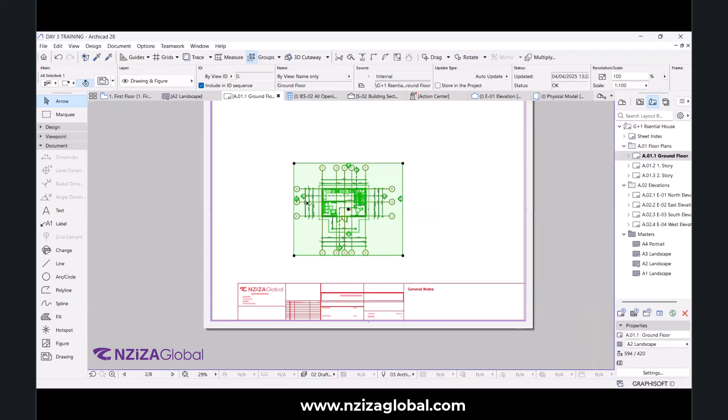Now this modified by or checked by, where are they? Let's first reset to our established drawing. Now, drawing name, now we need to put the drawing name here. I'll go back there and click here and insert auto text. I'll insert project details, I'll insert project name and click add.

Automatically it will come as residential 1. Now here I will put automatic, I'll put drawing name. Drawing name, click add. As it comes like this, it means in the setting we didn't set it. No, it means we didn't put our drawing here. So if you go up this time and open ground floor, automatically here will come as ground floor.

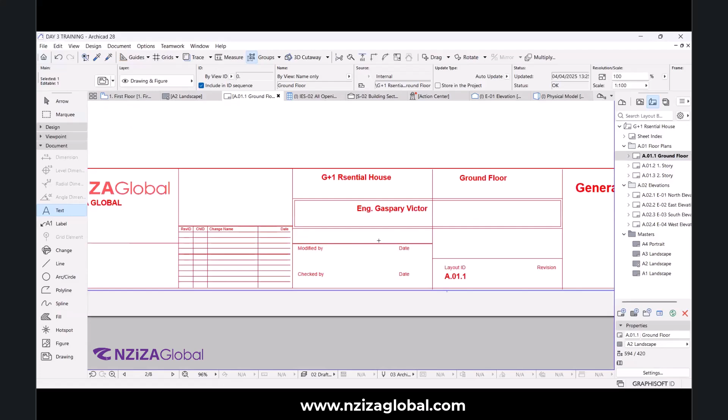Now, modified or what? Firstly, what is this? It means that the drawing has been generated and supervisor or consultant or contractor or client, anybody has modified it or has checked it or has pressed something to revise. These are these details. So where do we set such kind of detail?

We go on ground floor, layout setting, and we collapse this and go into revision history. Revision history, it's revision, it's change. So you can come here and add new change. New change, change name, like number of rooms. Let's say number of rooms.

At which date? It will detect today because we are doing it now. Last modifier, user—this cannot be changed because it's detected by the computer. Then I'll click OK.

You see, it is here. Transmittal set date. Work in progress, because we are doing it now. Layout info, status: work in progress. Okay? Status code.

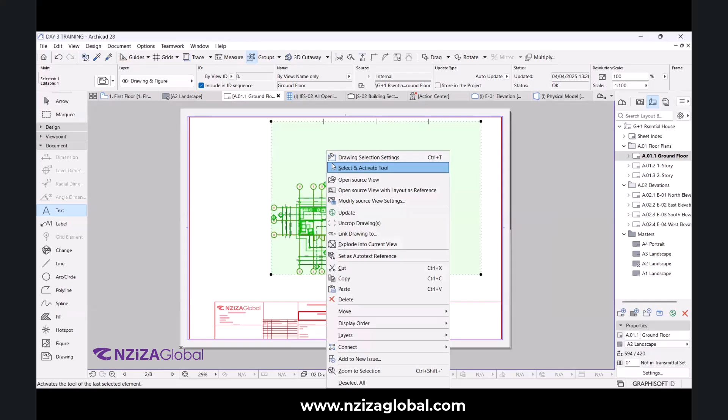Now you have seen this—that's number one. Number two, this drawing: if we need this drawing to be on this paper alone, we will enlarge it this way, right click... fit into frame, fit frame to drawing, click OK.

That frame will come back, but still we need to increase this—this one is on the scale. Oh, so this drawing has no even scale. Let me go back to layout.

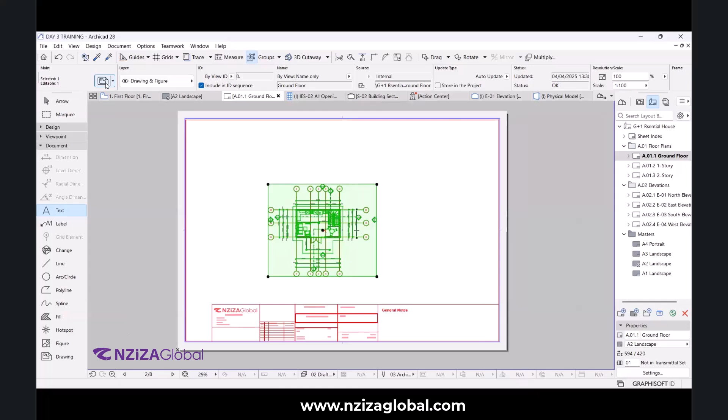Now let's go back at the top, on ground floor. You can see our scale is 1 by 100. Now, how to make this fit into this window? I'll right click—no, I'll go into setting here: size and appearance, drawing scale. I'll change it to 150 and click OK.

You see, it becomes big, but it exceeds now the size of our paper. How do we correct that? I'll go into setting, drawing scale, and select custom. Now 150 is too big, I will put 160, click OK, click OK. This one, perfect.

This is one way of putting it on paper. From there, I can click print, Control P. Here everything is good. If I have a printer, I will print, but I don't have a printer, so I will need to save it.

Let me go here and write ground floor. Click save. If I go on my computer where I saved it, you will find the ground floor here.

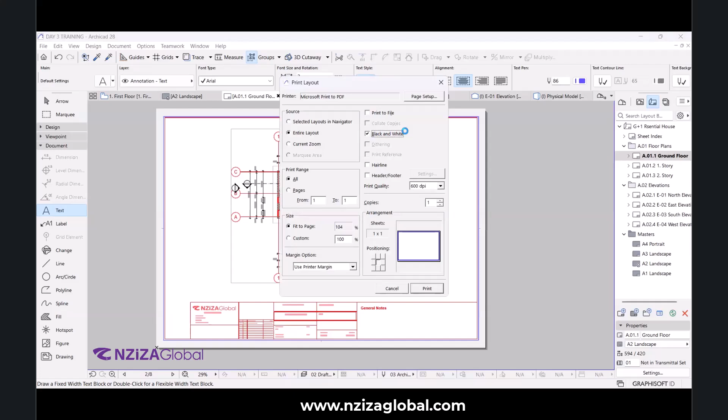This is everything about printing your drawing. There is another way of putting these on one paper, or saving them as one paper and everything—we'll see that after the lunch break.

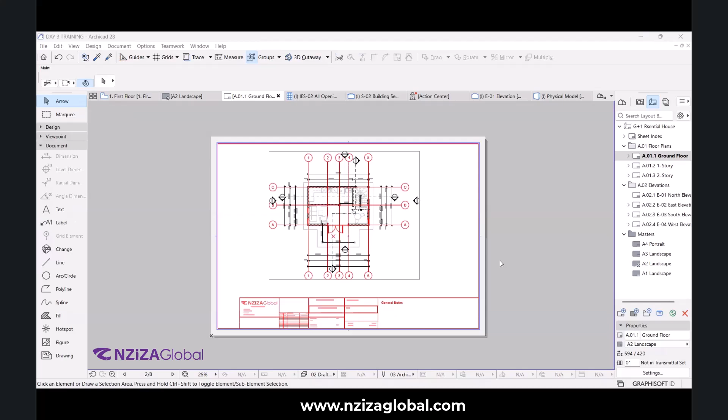Let's go to Save, Save As. And here, when you click Save As, before you name it, there is Document Options. By default, there is save PDF with color. There you check black and white, entire drawing, it's okay. Then you click OK and save. This will be saved as black and white.

That is one way of producing PDF. Now the second way is you have multiple drawings here. Let's say, for example, you have ground floor, this is the first floor, this is a roof story. Now there is the elevation, etc., etc.

You have saved this, and you need to produce them all at once as one document which has all 3 pages. This is ground floor, and you make sure in first floor everything is set as we studied. Even roof plan, everything is set.

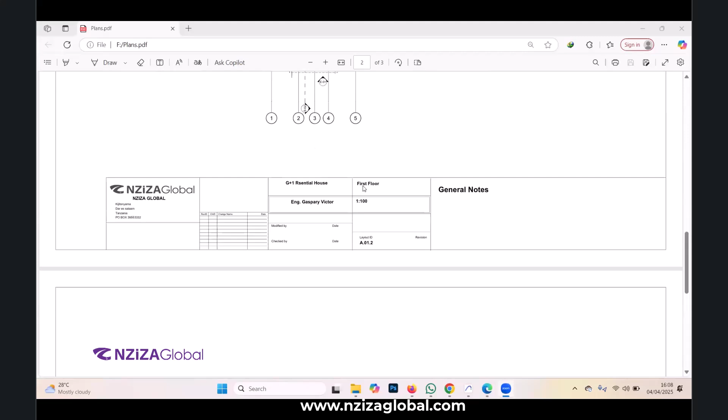Once saving is done, and you come to open it, you will see that it's already 3 pages. Maybe I'm sharing ArchiCAD and you are not seeing it, let me share entire screen so you can see. This is how it is: you can see first page, second page, this is second page, this is the third page. Everything in black and white, and the way it was written.

Now, I'll bring up my ArchiCAD again. Suppose that on this paper, roof plan, I'll put it here. I need to put schedules here.

And the schedules, I'll come into view map. Schedules are here, you remember we set everything in the beginning. I'll click on it, click and hold, bring it and drop it here. This is how we set it in our drawing, in our design phase. You see everything clearly, well organized here.

If I need to expand, just expanding that way. Okay, now here I can see the name, but here I don't see the name. If I need to bring a name here, I will go up here, I will pick up parameters. I will click here.

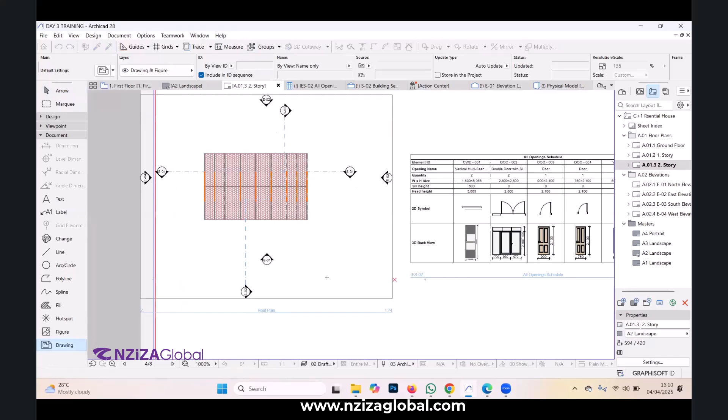I will go to inject parameters. I will click here. Automatically, the roof plan will come here and the scale will come here, repeating the parameters that I have here to this new drawing. Control D, press it very well. Control D, press it very well, this way.

Down here you can find something else to add. Now, there are a number of cases where you will put—you see, this time we have 1, 2, 3, 4, 5, 6 doors. Suppose that you have, how many, 50 doors. It will not fit on this paper. What you will do, you will press it and it will come in this direction.

What you will do is click on this end page, come and enable this restructure table. Once you click on it, it will split itself to fit into the page. That is what you must know about this.

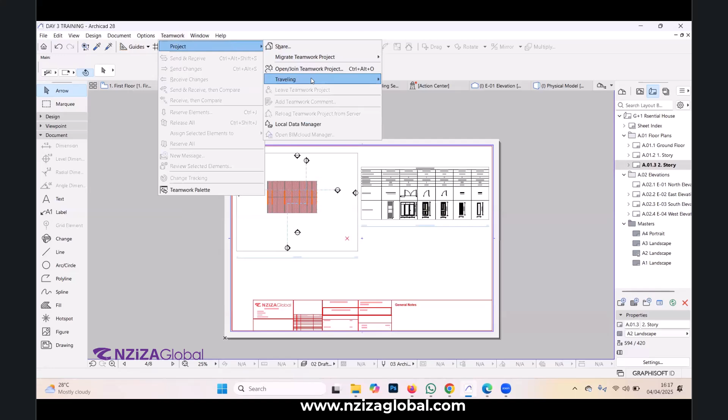Okay, now how do we make that possible? To make that possible, there are a number of software technologies that your company must implement. Starting from ArchiCAD - ArchiCAD has this option of teamwork, which is like another level, because before understanding modeling and the best practices in that phase, I don't think you can go here.

Now, if we go here to save, let me do save as - by default here the software says it's an ArchiCAD solo project. Why? Because we didn't create it for teamwork. So if you start a project from here, you can see there is send and receive - send changes, receive changes, etc. It means when I'm working on a teamwork project, I click here and the changes other people in other regions can see it. That is BIM collaboration already.

Okay, but this is limited to ArchiCAD. When it's limited to ArchiCAD, it's called closed BIM - it means if I'm not using ArchiCAD, I will not be able to collaborate with you. There's another thing called open BIM, where I can use this software and be able to transfer files to someone. Like if I'm using ArchiCAD, I'll be able to transfer files or give access to somebody using Revit, and they won't need to convert anything - they'll just grab the model and send it back to me.

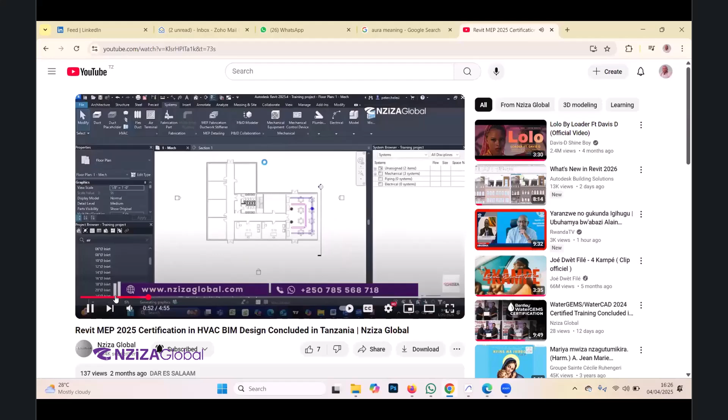If you open this video and see, give me one second, this course actually was dealing with that one. If you check what is being displayed on the screen, you see here energy cost and everything. I'm failing to catch it because it's just a quick movement, but this is what we were teaching.

And this guy is an architect like you. So anything you can think of, as long as it concerns software technology, we have dedicated courses. That's why the things you talked about, energy and anything, are found in this course. It's called HVAC, we're teaching HVAC BIM design. So what you can do is follow us just to be aware of the next training if the same comes up.

In the meantime, if you go on our YouTube you'll see we have a lot of courses about roads and bridges, and if you come into this playlist, you might find a video teaching about that energy thing. So that's my answer to your question now. You don't need to say you don't know why they don't teach it in Tanzania, because we got you now.

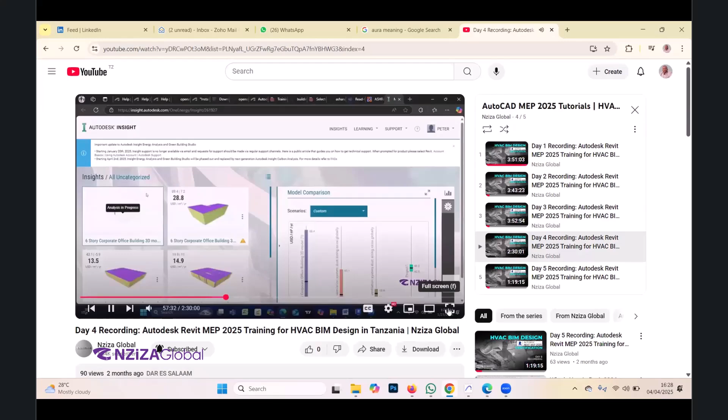Okay, I saw the dedicated video, this is the video of day 4. Okay, see what they were doing, they used Autodesk Insight in combination with Revit MEP. It grabs the model from Revit and performs those tasks you were talking about.

So they perform the tasks through that Autodesk Insight? Through the Revit model? Yes, Insight is like a plugin of Revit. So as an architect, you can start from running Revit.